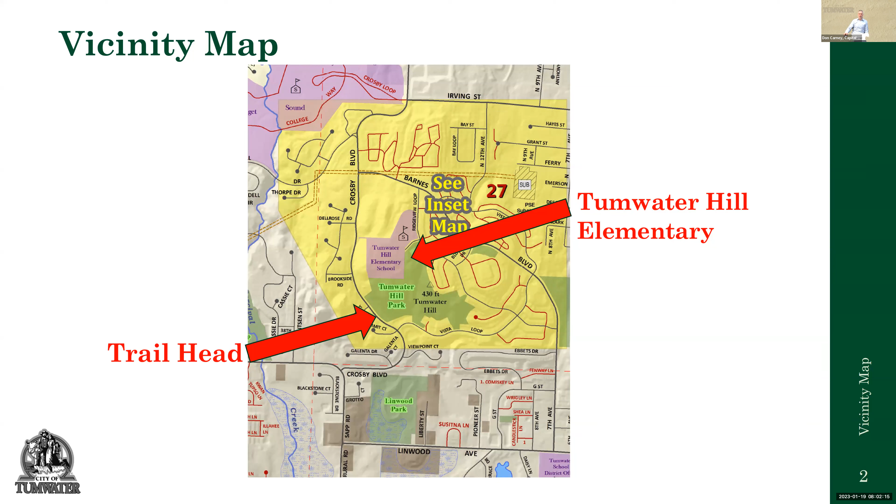So what and why? What we did is we tried to minimize the amount of disturbance of the natural ground out there. We walked the hillside, looked for areas that would create less disturbance of any of the natural ground, and also minimize the amount of material that we needed to bring in for the project.

It was a switchback trail. We had to put in some steps to make the steeper parts more manageable. It's still quite steep. We installed the split rail fence at one section that was quite steep. And actually, from that location, it's got a pretty good view looking out over the hillside and the properties below.

For why: it was to provide access from the neighborhoods down at Crosby on up to Tumwater Hill Elementary, and also to the park, and also connect to other trail systems within that hillside. Part of the plan is to create and maintain a transportation system and enhance accessibility to park infrastructure.

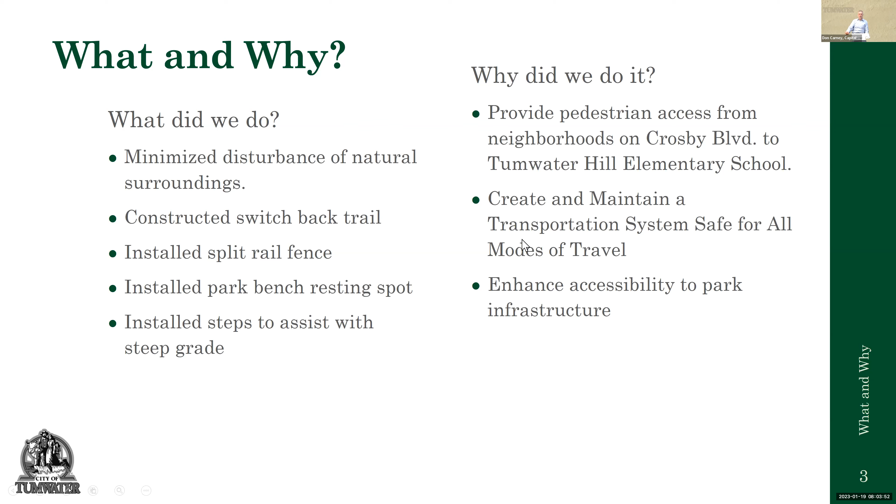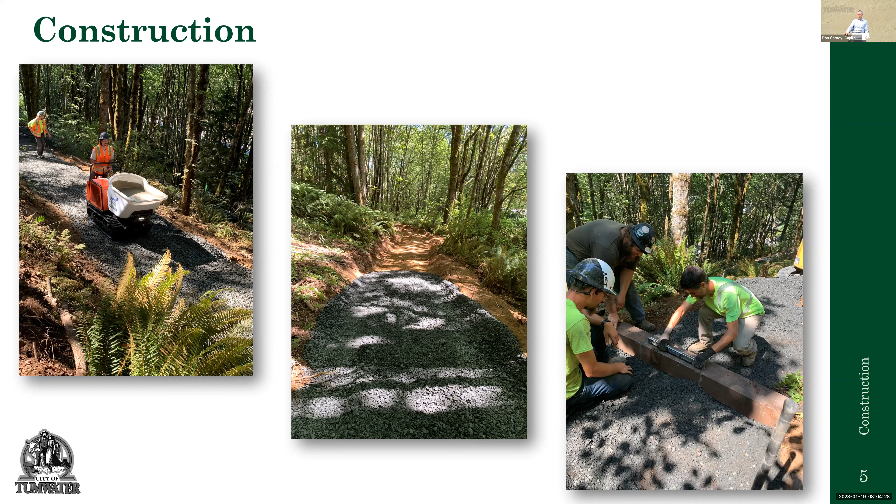The design was designed and managed by engineering staff. Funding came from residents through the park impact fees. Black Hills contract was $152,120, and it was finally completed with $150,174 - a little bit under budget, and I think we have a good system.

It connects the two, kind of adds to the trail system, makes it a little bit more interesting for hikers, walkers, and trail runners. I think it'll be fun. Any questions?

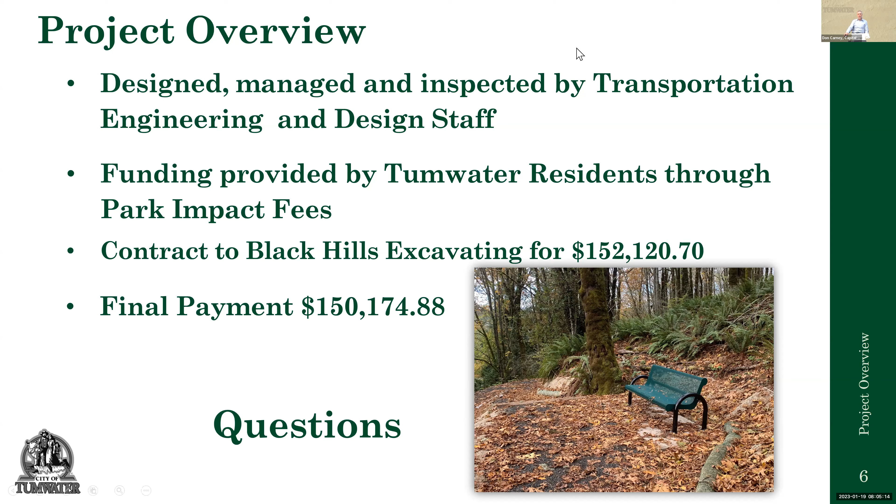I know that this is something that has been in the works for quite a number of years, because I remember when our HOA, we were very glad to give up that little piece of land to be able to have this project be part of the project.

And then having been up and down that hill several times, it's nice to have - I've heard from the neighbors and they appreciate having the path. So I appreciate that work.

Now, does it connect? There's a path that comes from the other development that's below the hill - I don't know if it's Ridgeview. I'm trying to think of the name of that street - that one almost seems to go straight up as well. So it would be on the right side that goes up the hill that pops out near the development at the top. Does this one even intersect with that one?

I'm not sure, I've not walked that one. I think there is a connection once you get up to the top, but that was never looked into to see what would make those two connect - the one up by Tumwater Hill Park. Yeah, not sure. Okay, all right, thank you. I just was curious because it is a fun place to hike.

So someday, Councilmember Schneider, we just have to accidentally meet. So look at that. So, all right.

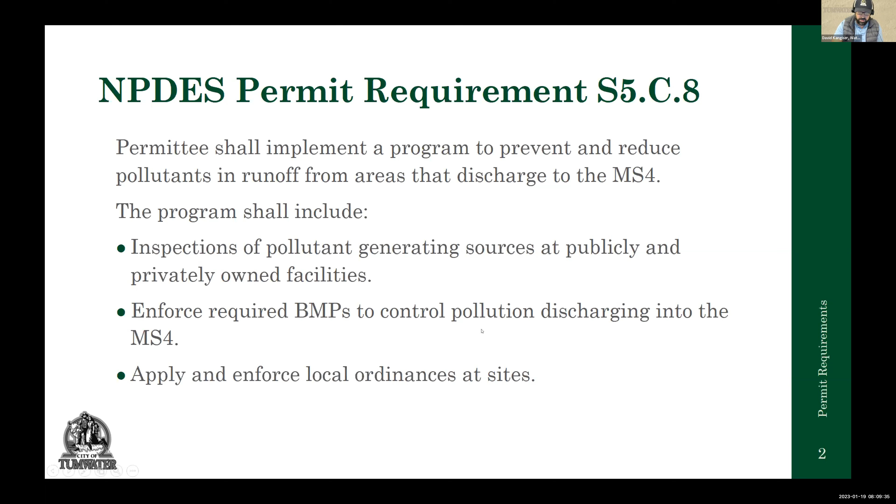So the requirements through the permit include inspections of pollutant generating sources at publicly and privately owned facilities, as well as enforcing BMPs to control those pollutant generating activities. I'll get more into this piece in further slides. And then we have the ability to enforce local ordinances that are currently on the books. The BMPs that we are going to be enforcing are spelled out in our drainage design and erosion control manual in volume 4. So we refer to that for our BMP selection.

So the goals of this program: reduce pollutants as they enter waterways through our stormwater system. That's the ultimate goal for water quality. But we also want to enhance these partnerships that we're going to be creating with our business community and help support environmental awareness through this program, so they're more aware of some of the activities that they do and how they affect water quality in the city of Tumwater.

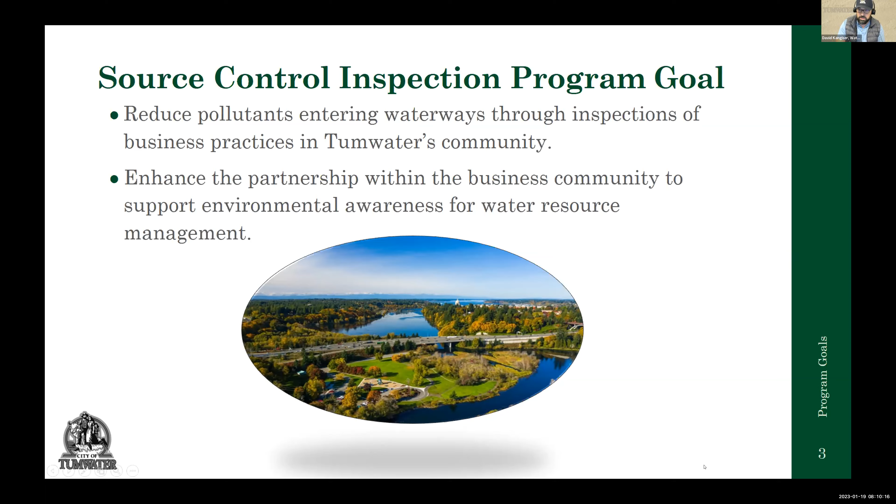So what businesses are we going to be looking at? The inventory criteria that we're going to be including in our inventory is connections to the stormwater system. That's a big one. So we're not going to be inspecting all businesses within the city of Tumwater, but mainly focused on the ones that are actually connected to our stormwater system. We used industry codes determined by the Department of Ecology to generate the inventory.

Our annual goal through the permit is 20% of our inventory to be inspected annually. Currently, our inventory is estimated at 402 sites. This is kind of a moving target as we go forward. The inventory was generated in 2019, pre-pandemic, and as we know, some of the businesses in the area have changed since that time. So as we go out and do our inspections, we're going to be refining this inventory as we go.

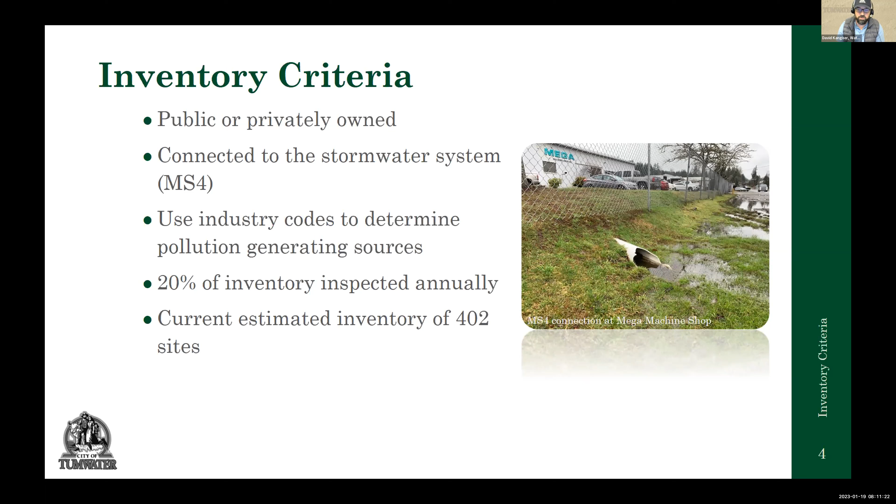So what are we going to be looking for when we do our inspections? Some of the inspection criteria we're going to be looking at is documentation and training. Do the sites have their safety data sheets in place? Are their employees trained on spill response? Do they have a spill response and prevention plan? And general housekeeping, we're going to be looking at dumpster management. Are the dumpster lids closed? Are they managing their dumpster juice, the term for the liquid that comes out of a dumpster. Do they have a stocked spill kit? And do they just do routine housekeeping, like routine sweeping and keeping their outdoor areas clean?

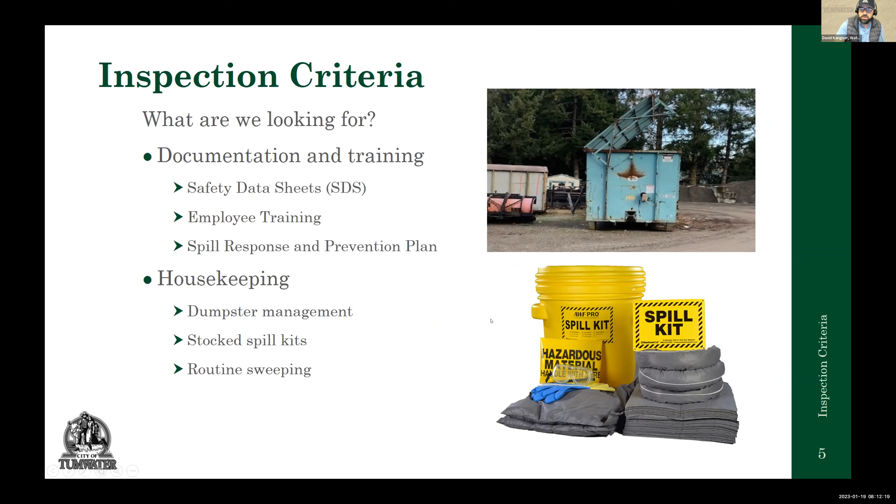Some other inspection criteria we're going to be looking at is washing activities that occur at businesses, like commercial car washes and whatnot - where does that wash water go? Does it go to the sanitary sewer? Does it go to the stormwater system? And are there BMPs in place that protect our water quality if it does enter the stormwater system?

So those are things we're going to be looking for, among others. There's a host of other criteria that we're going to be looking at. As far as maintenance, depending on what industry the business is, we're going to be looking at specific criteria for the businesses.

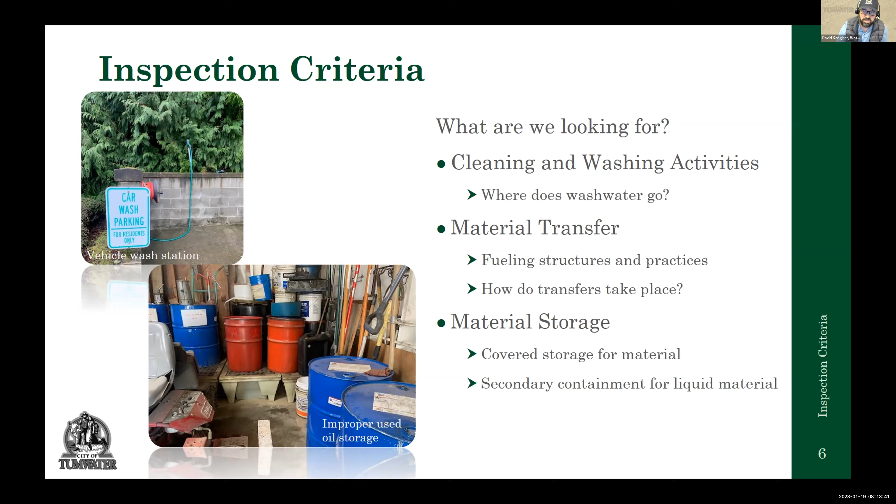Some of the resources we've developed internally for this inspection program: we've worked with our GIS team to develop a geodatabase in ArcGIS to manage our inventory. We've created electronic inspection forms that we can use with tablets or phones using Survey 123 and field maps. These have been a game changer for all of our inspections in the stormwater program.

The Washington Stormwater Center has developed a host of outreach material we can use for our own purposes, specific to industries that are pollutant generating. As for inspection duties, Matthew Joseph, our stormwater inspector, will be the lead inspector in the field for this program, and I'll be assisting him where I can through inspections or data management. We'll see how this goes given the amount of inventory we have, but this will be a learning experience for us in year one.

So our strategy for compliance—since this is a new program, we do have ordinances on the books that we can enforce, but we really want to focus on education for the initial go-around with these inspections. A lot of the businesses have their ways set in stone, but we can work with them on tricks and tips on how to comply with our ordinances. That's going to help us build these relationships throughout this program as we do our site visits. So that's going to be the emphasis for us: the education piece.

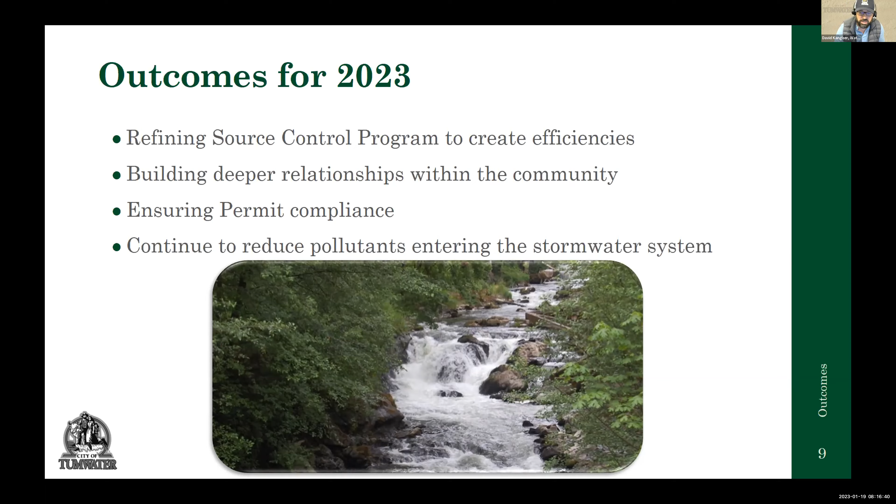So it's not a program that we're looking to connect businesses to our stormwater system. The inventory criteria is businesses that are already connected to our stormwater system. So if a business is already discharging to our stormwater system, it's included in our inventory matrix. If it's not connected, it doesn't need to be included in this program initially. So it's not a program really looking to expand our stormwater system to businesses—it's more about inspecting the businesses already connected.

So when we have new businesses establishing themselves in the city of Tumwater, are we going to require them to attach to our stormwater system at that point, or no? Okay, yeah, no—we're really focused on just the existing businesses that are connected, and new businesses and developments coming into the city. We're really trying to get them to infiltrate on site, so they're not connected to our stormwater system. That's the goal. Thank you so much.

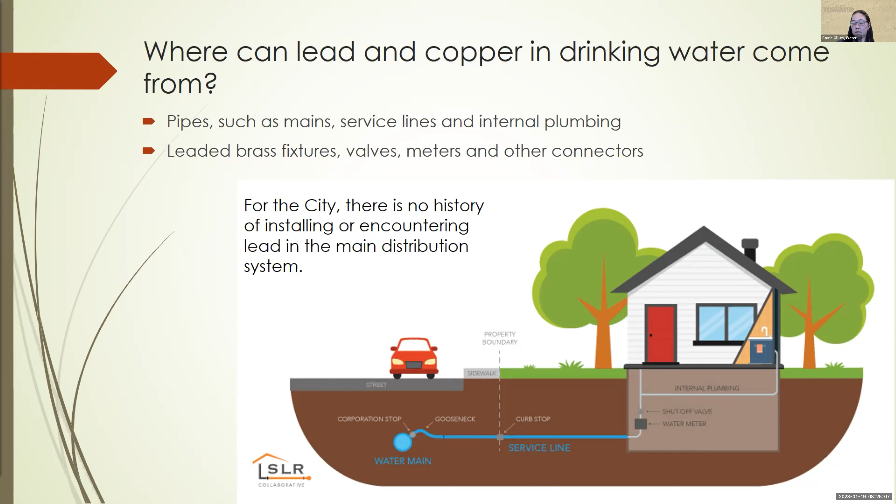Ways to reduce lead and copper in drinking water is through corrosion control. Water interacts with metals, and those metals can then be released into the water, and that's called corrosion. So one of the things to do is control pH to control the corrosion. The optimal pH we would like to have for our water is between 7.5 and 8.3. Our city controls pH through aeration at our two treatment sites, which is Bush and the Palermo water treatment plants.

It could be because there is some variation in the households that we do end up sampling, because it is on a volunteer basis. So it could be differences in the system, which I can also talk a little bit to when we talk about our corrosion control study.

I mean, it looks like it's skyrocketing. It is increasing, but it's still well below the action level. So, we're registering in 2022, we were at 8.4, but the action level is 15. So we are still at half the action level for the 90th percentile.

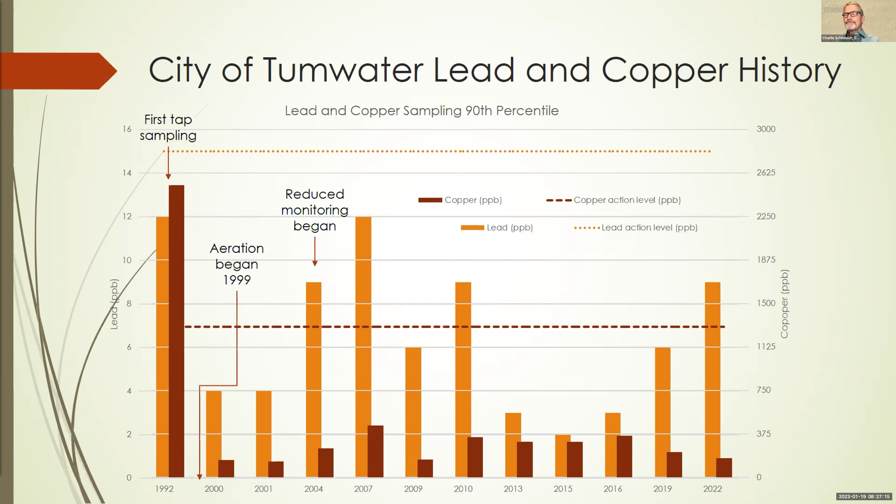Okay, so how we ensure our corrosion control is working is through our customer tap sampling program. Every 3 years, we're required to collect samples. Right now, we are still currently at a reduced sampling rate of 30 samples from tier 1 homes.

Tier 1 homes are primarily based on age, 1983 to 1987. That age range is considered to have the highest potential amount of copper pipes with lead solder, and so that's why those homes are targeted.

However, if we do not get enough volunteers from a tier 1 home, then we can also collect from the other 2 tiers. So it's really dependent on who we get as volunteers for that year and who's willing to allow us to do the testing and sampling within their home.

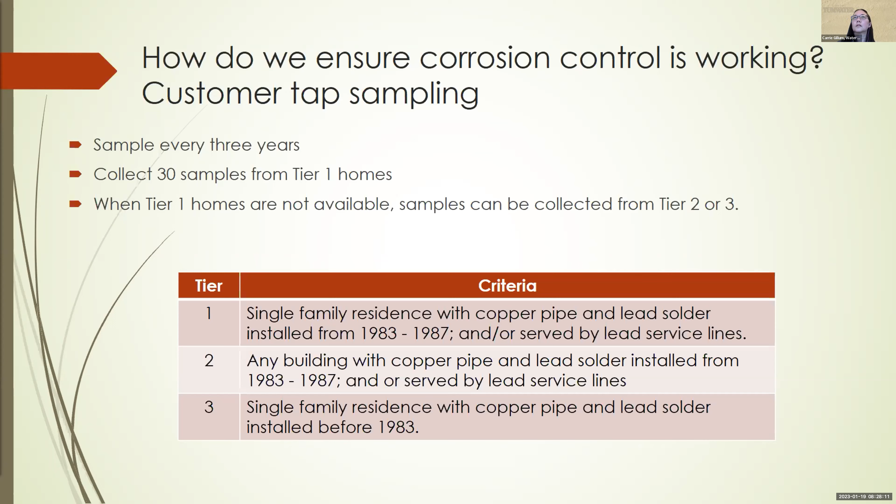So for our 2022 lead and copper sampling, we had a pretty good response. We opened it up pretty broadly. We had 230 people initially volunteer, and we reached out through social media, newsletter articles, and mailings. We did some direct mailings, especially to our tier 1 homes that we were able to identify.

But once we were all completed and all the water samples were collected, we had 138. We do have some attrition of people, if they're not available or just lose interest over time. So we didn't get all 230 people to necessarily sample, but we still had a huge amount, because we do struggle a lot trying to get even the 30 samples for compliance. So we had 30 for compliance, 108 for investigative.

So the results of our sampling for our 30 compliance samples, we were able to get tier 1, tier 3, and other homes to participate. What we have to do in order to be in compliance with the lead and copper rule is our 90th percentile must be less than the action level.

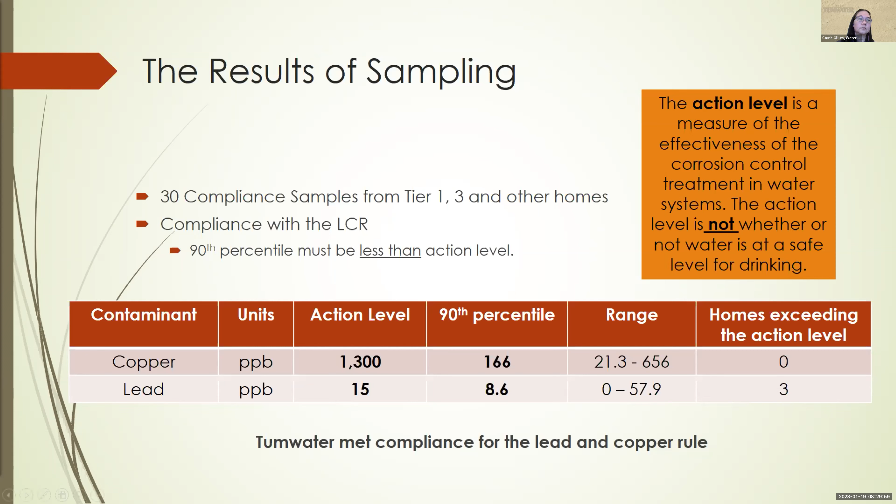This is showing all of our samples together. We only needed to report on those 30 to DOH, but these are additional samples that we had taken, and there was a reason behind it. To summarize, we had nothing above the action level for copper - none of our homes tested above for copper. We had 1 additional out of our investigative samples that was above the action level on lead.

We ended up doing follow-up sampling for those 4 homes, and it turned out that all but 1 came back below the action level. Some of the reasons the others may have been higher initially was we were talking to some of the people sampling, and they let their water sit too long. There's a certain criteria that needs to be met in order to take that sample. Once we did the re-education and had them resample, their concentration was actually lower.

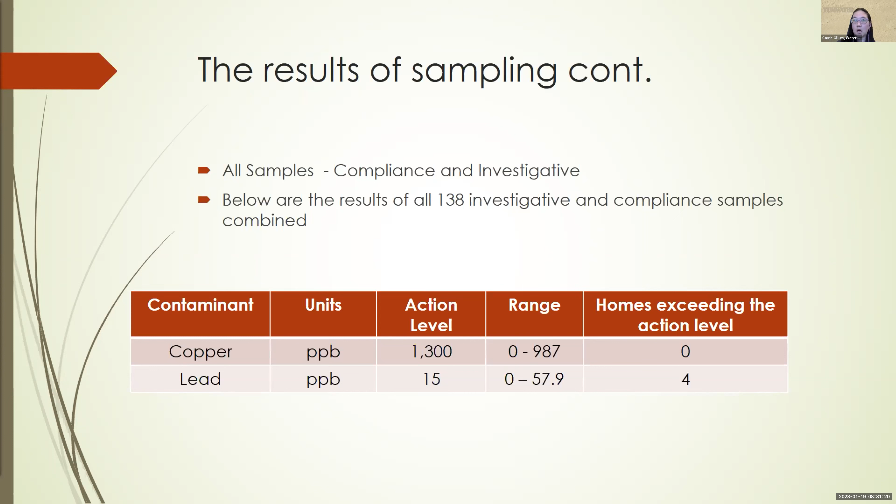The one house that did come up above the action level a second time, they believe they probably did have lead solder in their home because it was just that old and they hadn't done a retrofit. So it's very encouraging to see that basically we had 1 home overall after resampling in the entire 138 that would be above the action limit.

We took those additional samples to help with our corrosion control study, to have a better understanding of the entire distribution system, because the additional 108 investigative samples were all ages, all over the city. It was more spatially spread out, as well as not confined to that 1983 to 1987 timeframe, because we really wanted to understand if there's something else going on in the system that we don't know about.

The reason for the corrosion control study was that in 2019, the city became a large public water system. A large public water system is defined by the number of residential and non-transient population being served - if you're over 50,000, you're considered a large public water system. So we qualified, we graduated. As a large system, we are now required by the LCR to demonstrate optimal corrosion control.

Through that, it requires a study and a report done by an engineer. So in 2021, we contracted with HDR Engineering to conduct the study and complete a report. As of November 22, the report was completed and submitted to the DOH for review. Now it's just a matter of them reviewing it and determining what steps we have to do to obtain optimal corrosion control.

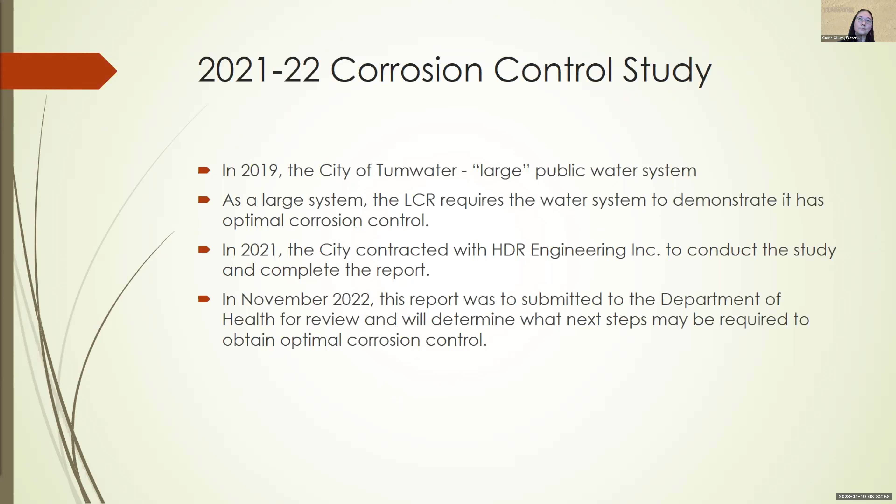Here are some of the report findings. Aeration installed at the Bush and Palermo treatment plants is giving the higher pH that we wanted, and a more stable corrosion chemistry, so they're being effective for corrosion control. Our airport wells, however, have a lower pH, and it's because they don't have corrosion treatment. Right now it's just straight groundwater, and as I stated before, our natural groundwater is a little more acidic - it's below that optimal pH level that we want.

And then also minimal blending is taking place in the system, so unfortunately we can't get some of these waters to mix together to kind of equal out the pH that we have. One of the positives though is that right now all of our lead and copper corrosion are below the action level, so we are in compliance.

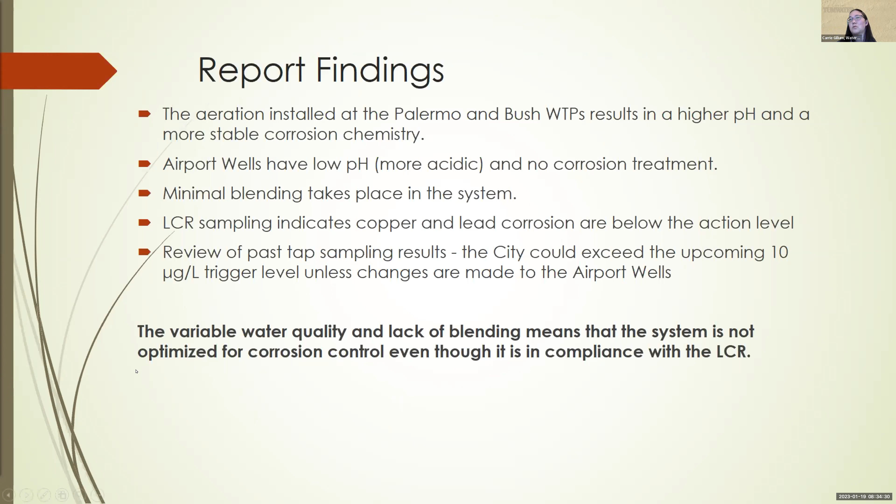But one of the concerns the report pointed out was there is a new trigger level coming out as of 2021, because the lead and copper rule is revised, and that's 10 parts per billion. Unless there are changes made to the airport wells, we could end up hitting that trigger level, because we did have 2 years in the past where we were above 10 or at 10. Overall, the variable water quality and lack of blending means the system is not optimized for corrosion control though in compliance with the LCR.

So the recommendations that HDR has given, which was put in the report, is that we do treatment at the airport wells. This can be done one of two ways - either we do aeration like we have at our current treatment plants, or we can add a chemical called caustic soda. A secondary recommendation would be to decrease the airport well use so that we have less of this water interacting in our system.

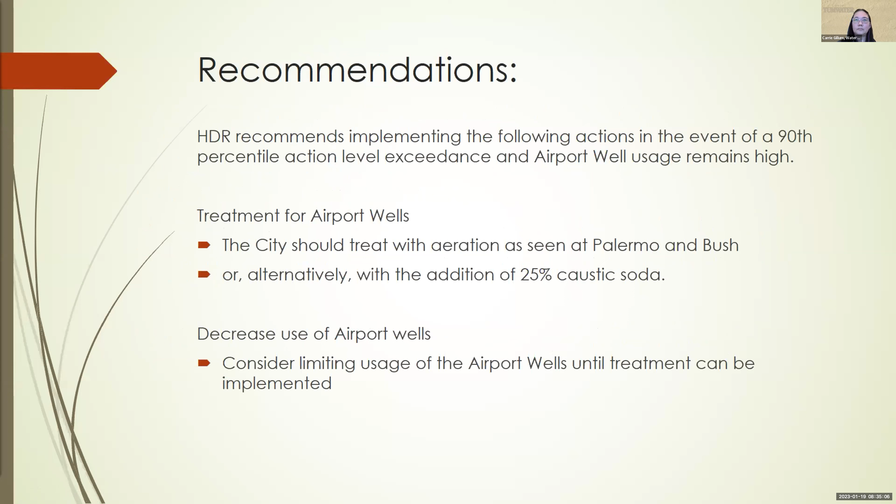So the next steps we're looking for: currently the study is underway by DOH. They will determine what needs to happen based on what was recommended in the report by HDR. Treatment is most likely going to be required for the airport wells if we're going to continue to use them. Right now we use them seasonally, and they'll probably have to continue to be used seasonally until we start bringing other sources online. The DOH has 6 months to review this, so probably by spring I'm hoping to have some additional feedback from them and see where this is going to take us.

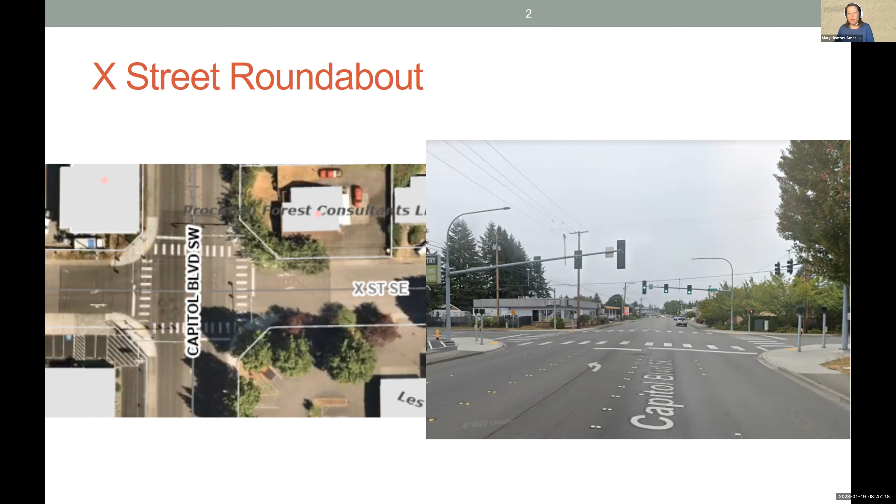So first up, let's talk about the X Street roundabout. This is the next project in the Capitol Boulevard Corridor Plan implementation. You are, I am sure, very familiar with the project to the north at the Trosper intersection. But this project involves converting the X Street intersection from a signalized intersection to a roundabout. Design was completed as part of the Capitol Boulevard Israel to M Street design, which was also partially grant funded, although we're not going over the details of that this time. For this project, as I said, we'll be putting in a roundabout.

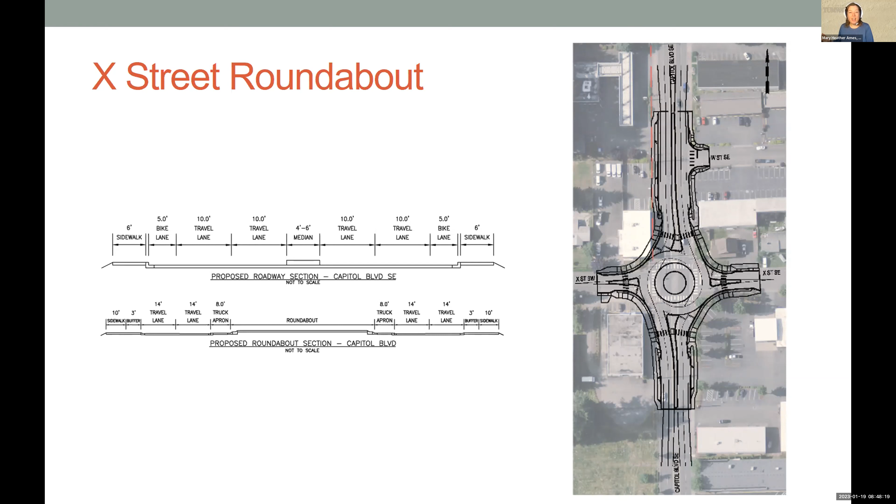Things that made this competitive as far as the grant funding is concerned is that we're providing pedestrian and bicycle facilities. There's less idling with a roundabout, which means better air quality. It's naturally traffic calming while keeping the flow of traffic moving, and overall our safety increases. As I've probably said to you lots of times before, one of the best things about a roundabout is the decrease in conflict points. You don't end up with T-bone type crashes in a roundabout or head-ons. They're much more glancing angles, which is better for all. Of course, we don't want any crashes, but if we can keep them less severe, that's awesome.

So as far as funding, as I mentioned before, design was funded separately with the corridor design. We received, in a previous year, the first line of right-of-way funding, so 866,470. Then this year, TRPC as a region did really well in keeping up with the requirements of the funding that goes through TRPC. So we were able to receive some additional funding that decreased the match that we needed. So still right-of-way being estimated at 5 million, but increasing the grant amount from that 866 by 269,500. So that was pretty great.

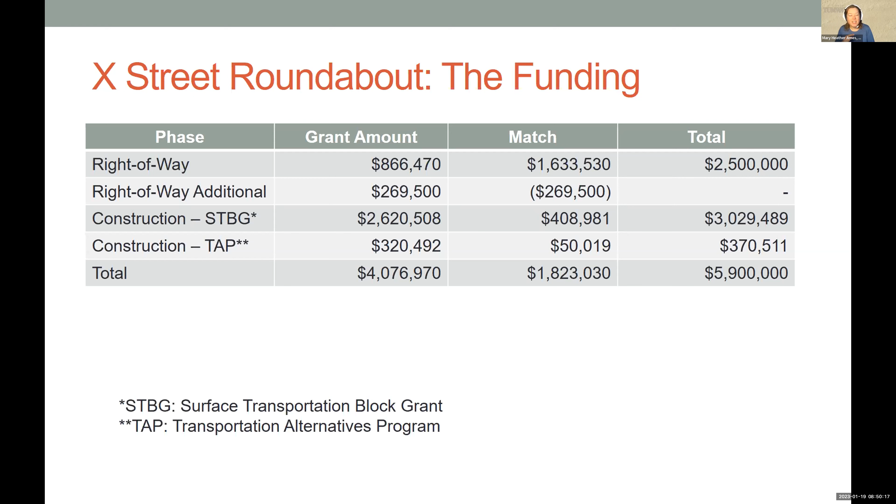And then we applied for construction funding and were successful. So for that, the total construction estimated cost is 3.4 million, and the grant funding total that we were awarded totals 2.941 million. This was split between STBG, which is a Surface Transportation Block Grant—people sometimes refer to it as STP, but Surface Transportation Funds—and TAP or TA, which is the Transportation Alternatives. So we were able to say, hey, this has enough pedestrian and bicycle portion of the project to support some of the funding coming from that grant source. So together the grant funding is 2,941,000, and I think I already said that. I apologize.

The next project is the Tumwater Boulevard interchange. You're familiar with this location, I imagine, it being the closest interchange to City Hall. We also get a lot of traffic through this. Both our daytime population and our total official population use this interchange quite a bit. It's also an interchange that is crucial to the development of properties around it. We know that there is new housing, retail, and commercial properties and industrial, the port, all around this interchange, which will be using it. And so we know that it needs this focus.

The project was started—I found records that this project was started back in 2004, actually, with design and permitting, pre-design and pre-permitting type activities. We applied for a TIGER grant in 2009. So this project has a long history.

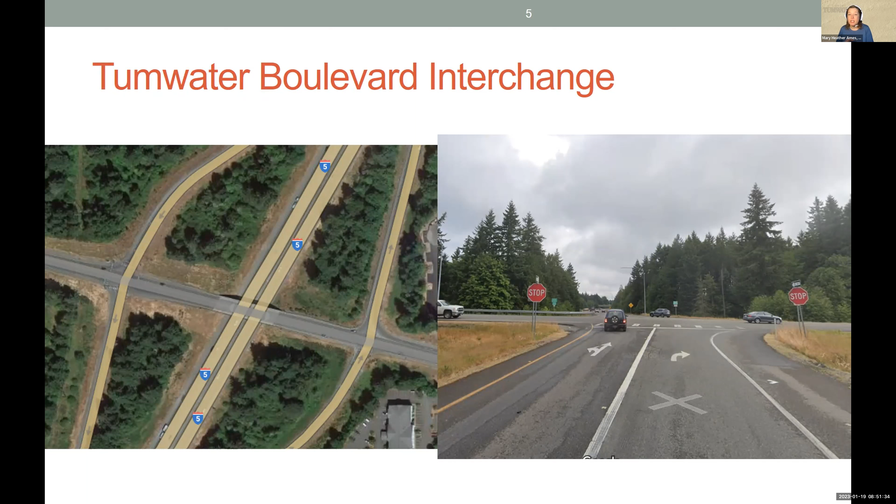In my time here, which has only been about 3.5 years, city staff have renewed the focus on this interchange. We've built upon what was completed years ago and broken the project into phases strategically for completion, making it more bite-sized chunks.

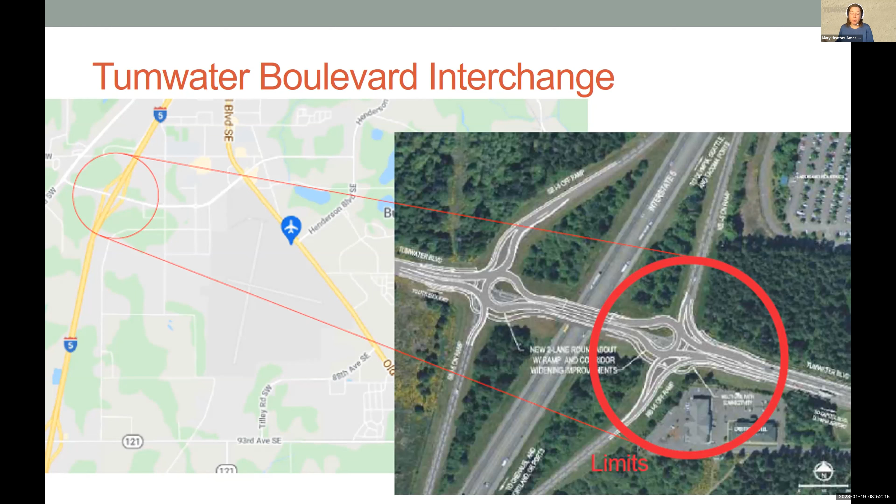The project is necessary for the development of the land around here, and we believe it will be beneficial to the people who work in this area as well. These were points that made us more viable to the funding agency, in this case the Transportation Improvement Board. I'll talk more about them in my next presentation.

This project will be revisited in my next presentation, but the grant amount is 2.25 million. Our match, made up of both developer mitigation fees and local city funding, is 4 million, for a total project cost of 6.25 million.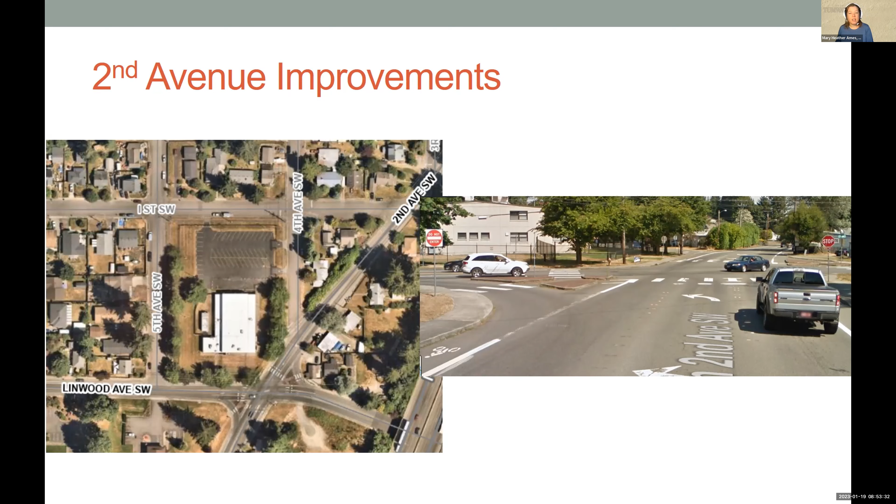We applied and it is on the list of recommended projects for the legislature, so we'll know by the time that session ends whether this has been successful. But I'd like to give you an update now so you know what's coming. We're looking at adding bike lanes and sidewalk along 2nd Avenue to the north, particularly from this intersection.

We've also looked at ways to make the intersection safer for pedestrians and bicycles crossing, shortening crossing distances and decreasing vehicle speeds through the intersection. We've affectionately titled this schematic the Blobabout, also known as the Peanut. We're being mindful of how to make this intersection work for vehicles, but also for the potentially small children using it.

Question: so the peanut, will that be a solid raised section, like what we do with roundabouts? Answer: It's similar, we may end up doing a combination. This is definitely a schematic, but we may end up doing a combination of raised and painted sections depending on what works best.

We also have another special user, so to speak, with the fire station on the southwest corner. So we'll want to make sure the intersection works for those larger trucks and buses, since the school's bus entrance is on Linwood. But we recognize those are special cases, not the majority of vehicles that go through here, so we want to make it work for them while also making it safer for children walking and biking. More details to come, and it'll be an interesting process to go through.

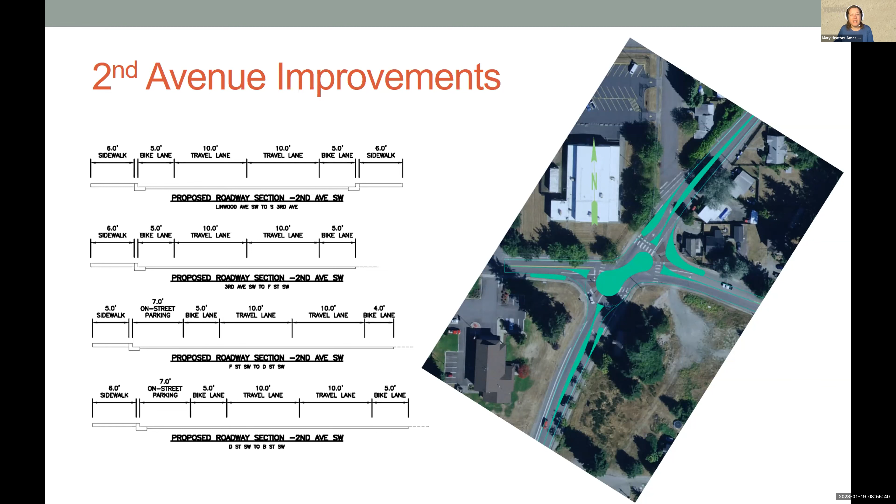As I said before, this is on the recommended list, however it's not a done deal. I heard a joking story from someone at WashDOT that other jurisdictions have, based on their place on the list, prepared the obligation paperwork to get started on their project. They cautioned me not to get that excited, but we will be ready. We believe we have good chances on this one.

Our grant request was just over 2,115,000. We estimate the total project at 3.6 million. Much of the match is for the paving portion — as long as we're there, we're going to do the paving on 2nd Avenue, so much of that match will be able to come from the Transportation Benefit District funds to complete the 2nd Avenue paving, which is really exciting.

I was just driving there yesterday, and it's definitely going to be an improvement when we get that done. At this point, I'm happy to answer any questions you have, but as a reminder, this one is not for action. The next one I will have a requested action.

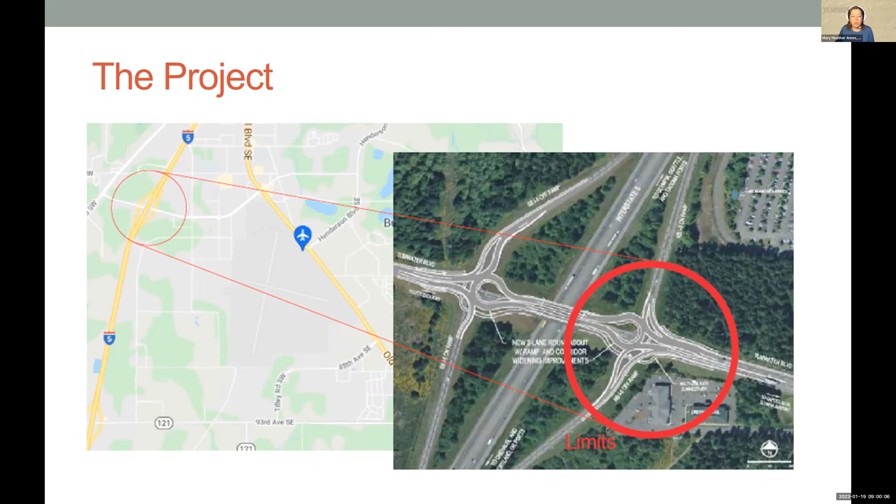So as far as what's next, we're hoping for some action about signing the agreement, and then we'll be able to move forward with the project. I would be happy to answer any questions, after I remind you that for this item, staff requests the Public Works Committee recommend the City Council approve and authorize the mayor to sign the fuel tax agreement with the Transportation Improvement Board for Tumwater Boulevard interchange.

Councilmember Snyder, do you have any questions? No? Okay, would you like to make the motion then?

Yeah, I could do that. That's not a problem. I'd like to make a motion - do we need to repeat it? Go ahead, go ahead. Can we just say so moved, or do we need to repeat it? That's a good question. You don't need to repeat it. Then I'll say so moved.

And I'll second that, and we'll take the vote. All in favor, say aye. Aye. Aye. All right, thank you.